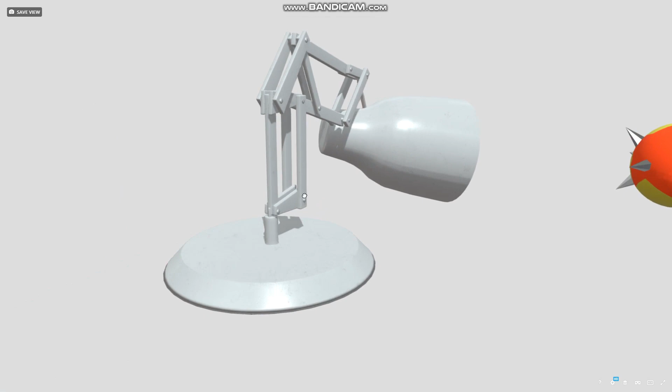Same with the... actually, I'll show you it now. This is the final lamp. This was how it ended up. Like I said, it kind of just looks like the normal lamp. Obviously, I added a little bit of texture to it, just on this bit, so you can tell it's been used and it's not fresh.

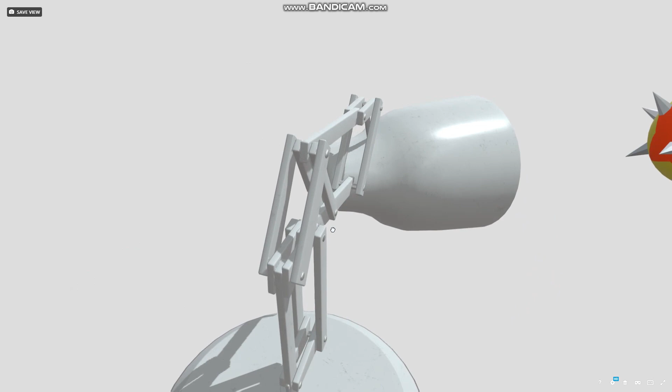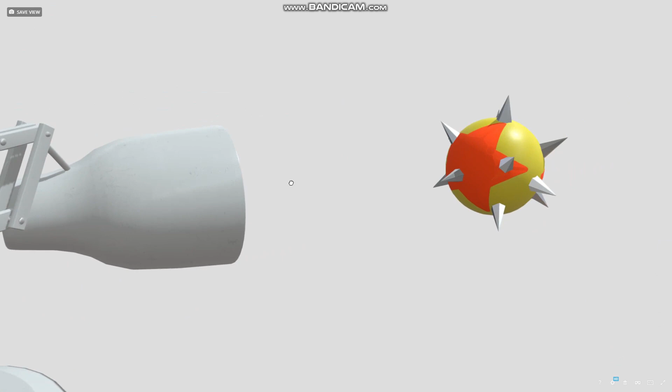I wanted to add a little bit of dust or something, but instead I went for scratches. I tried to add some finger marks as well on the head and maybe around the structure, just for when someone's trying to rotate it. But it's not that clear to see. And then, like I said, the ball was last minute, so nothing I'd change about it.

The spikes themselves I'd make high poly, just so it doesn't look like the default shape, which is the cone. If I actually show you... oh, actually I made it even less. So if I did use the default one, it would have actually looked a little bit better. But yeah, I think there was a polygon issue as well. So I only had, because this is the default sphere, but the cones were the part that were different.

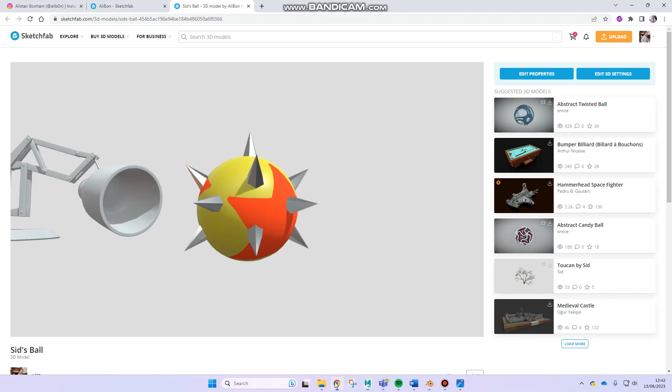And even though it's 800 polygons, I still deleted these inside faces because they're not going to be seen, and in a game there should be nothing that could go into the ball. I would have made the points a little bit more high poly, but also the paint job for the ball was the actual very last thing I did.

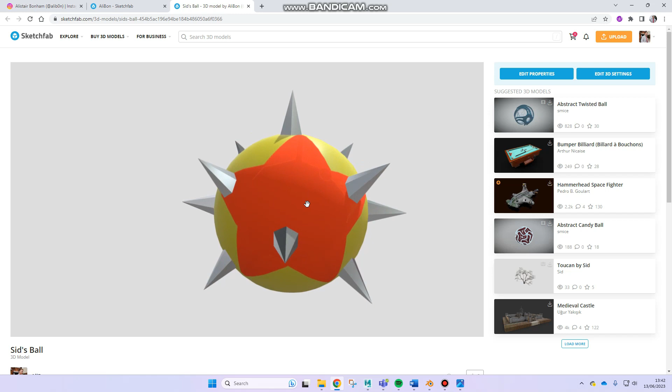And of course I didn't have a brush which could just do a basic star. I tried searching for it in Substance Painter, but couldn't find it. So I kind of just had to find one by hand. You can even see it here - find a brush which has some kind of angles.

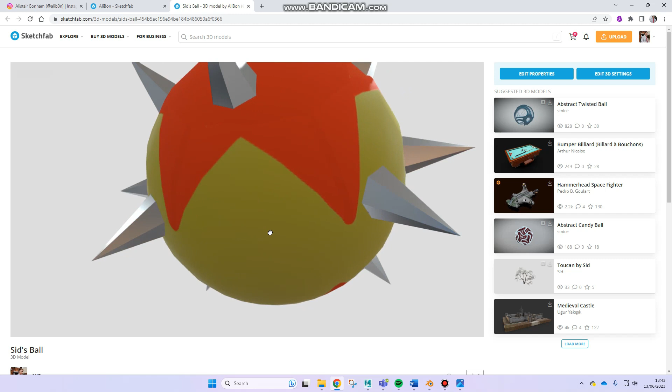So these lighter shades are one brush, and then all the darker shade - let me change the lighting - then all this darker red is hand brushed, and actually for some reason it's under the other brushes. Whereas here, on this star, you don't have that problem, and it looks a little bit better.

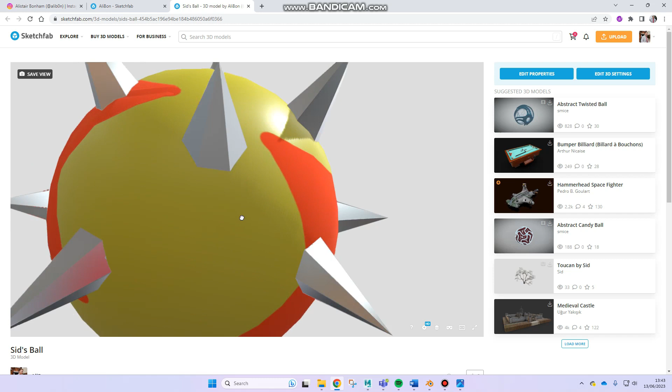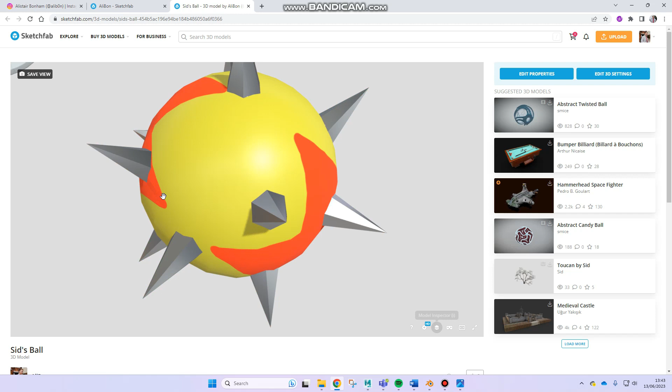And if I actually... I'm not going to search that, but the actual Pixar ball has like a blue stripe going over it. Unfortunately here, if I get the UV checker up it should show - the cut that I made for the UV goes where I would have put the line for the blue.

So the worst part of the piece is the ball, which is why I don't get why I've gone on about it so much, because it's the lamp that is the main part - the lamp I modelled a year ago and the one I've modelled now. The first lamp was done for a little short film, and the second lamp was made with a game in mind. It was used for the competition, but it would be used for a game.

And even though it's made for a game, I would use it in the short film, like I'd even use the high poly, because if you look at the base, it looks well smooth - you can't really tell where the edges touch. And then for the head it's the same thing. Look how smooth that looks. It's a beautiful little cup.

So did I actually make... I made those the same as this one. Actually, I don't know why that shape - sorry, I'm just looking at the screws, because that actually has caused some problems, hasn't it?

The screws are actually meant to be softened, like the edges of them are meant to be softened. On mine, I've got it so that these dotted lines are soft edges, and as you can see, there's not really a hard edge on the supports, but then for the screws they are. I think they look a little bit better if they're softened, a little bit more realistic and smooth. So that's another change.

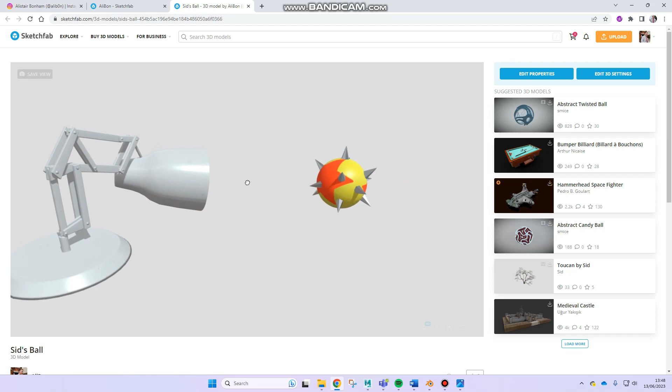So this is kind of like the purpose of the video, just so I can go through the models and a little bit selfishly pat myself on the back for doing well. And I hope that anybody else who is in the same situation I was in a year ago can look at this and say, oh well, you do get better. Maybe I'm not the most talented 3D artist, but as long as I've worked hard on it, and I really do love this.

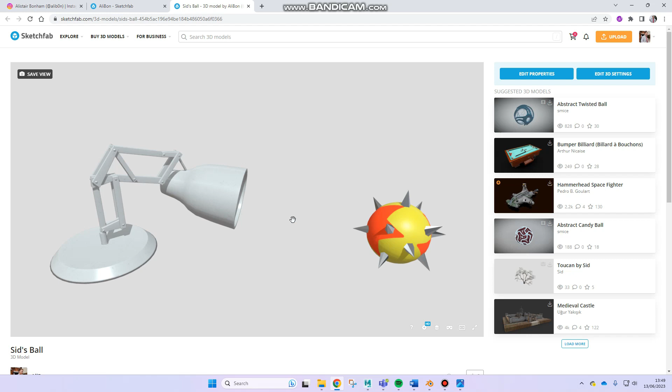Although it was stressful making this lamp, and it was a bit of a unique experience trying to make this model in 6 hours and everything, at the end of it I was like, I'm glad I've done it. One, so that I can make this video, but two, to have evidence that I've got better.

But just because I like the process, and it's a lot of problem solving of, okay, how am I going to make the lamp head? It's like, oh well, I'll box model the head and then bevel it. And that's my analysis of my lamp done.

Hopefully you've learned something from this, like how I made it, what I was looking for. Hopefully this inspired you if you are a 3D modelist. I would recommend doing competitions.

Now that I've done one and I've realized that I need to be faster and my planning needs to be a little bit better, I know that I'll need to work on that experience, because another thing about this competition is it was 7 hours overall. So it's 6 hours of modeling for the competition itself, and then an hour's break. So if I was working in the industry and it was an 8 hour day, with 1 hour for lunch and then 7 hours of modeling or working, then I would probably not be hired.

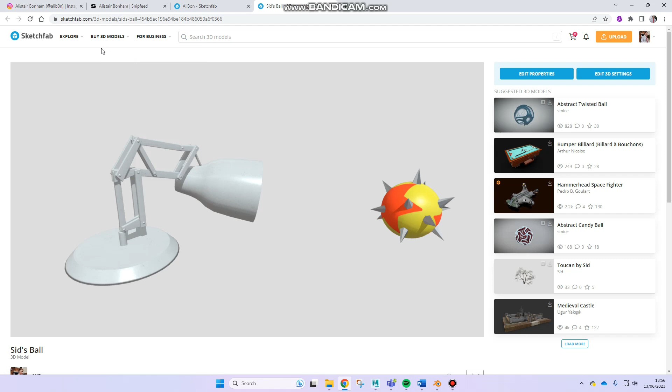So yeah, this has been a really good experience, and obviously I've managed to make this video and compare these models, and it's helped me be a little bit more introspective of myself, rather than looking outwards at other modelists and being like, oh, what do they do? So yeah, that's the video done.